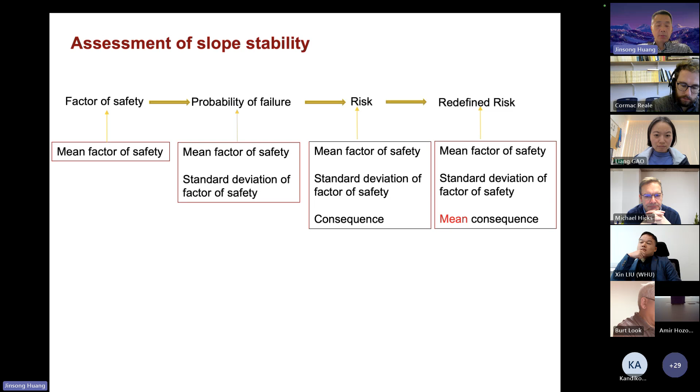So firstly, I want to give you what I'm going to talk about. One-dimensional analysis is about the importance of spatial variability when we are looking at the probability of failure. And then we also look at the three-dimensional case, where the variability in the third direction must be considered. And then I'm going to talk about the quantitative risk assessment of slope. And then I'm going to use the one-dimensional rainfall-induced landslides to showcase what the quantitative risk means. And finally, we'll talk about using site investigation data directly in slope stability analysis. This is our most recent research.

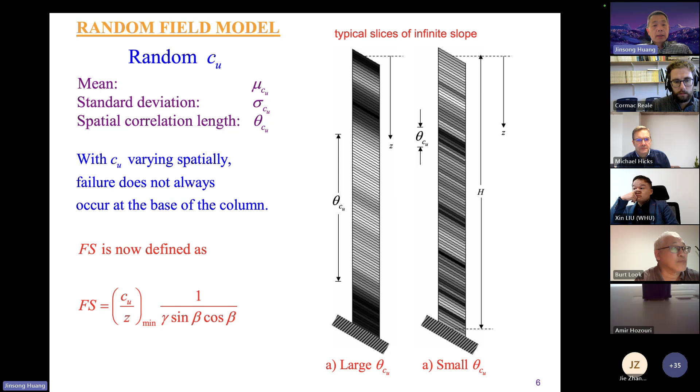We can clearly see that in this formula, if Cu, undrained shear strength, is a function of depth, which is Z, the minimum factor of safety will happen at the place where this ratio reaches the minimum, not necessarily at the bottom of the slope. So when we are using random field to generate the one-dimensional random field to map onto the finite element mesh and do the Monte Carlo simulation, we will find some of the failure will happen in the middle of the slope or not necessarily at the bottom. You can see in the picture.

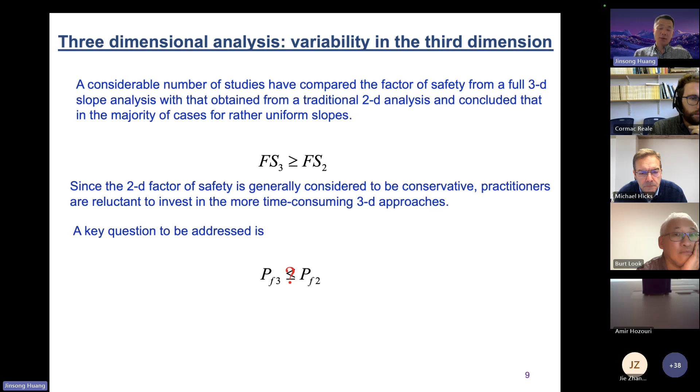And then the next example is a three-dimensional analysis of the slope stability. Traditionally, people know if we use a two-dimensional plane strain analysis of the slope stability, we will always get a lower factor of safety than the three-dimensional analysis. If all the geometry and material properties are the same, this is always true. But if we consider probability of failure, whether the three-dimensional estimation of the probability of failure is smaller than the two-dimensional probability of failure, this question is very interesting, right? Because if the three-dimensional factor of safety is higher, supposedly people will think the three-dimensional probability of failure is going to be smaller, but this is not the case.

This is our result. You can clearly see that the three-dimensional factor of safety is always higher than the two-dimensional one. But when we increase the length of the slope, which is in this direction, the factor of safety got reduced because of the side supports. The effect of the side supports reduces as we increase the slope length. And then the three-dimensional factor of safety converges to the two-dimensional results.

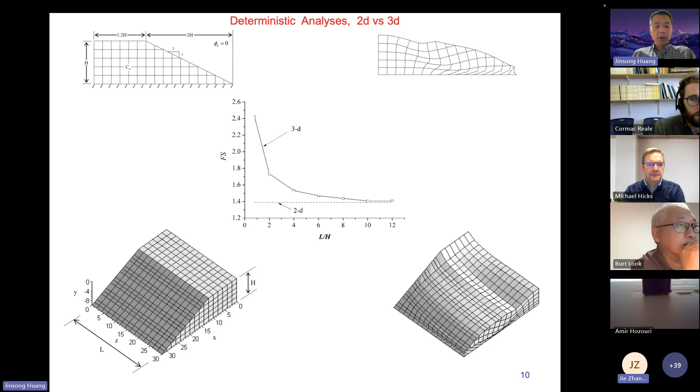So if we look at the probability of failure, and then we just simply extend the two-dimensional model to three-dimensional model. So we simply copy the two-dimensional properties and then extend it to the third direction, and then fix the two ends. In this case, if we estimate the probability of failure, the three-dimensional probability of failure will be always smaller than two-dimensional probability of failure. That's just because of the side support from these two ends.

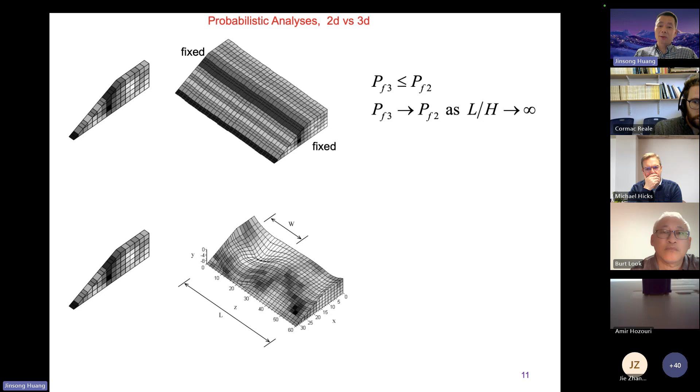But if we consider the spatial variability in the third direction using three-dimensional random fields, you will see that some local failure can happen. Okay? That will cause the probability of failure to increase. So if we look at the results, let me just go.

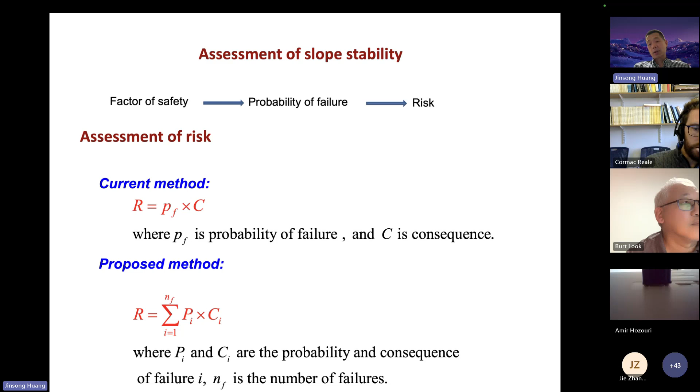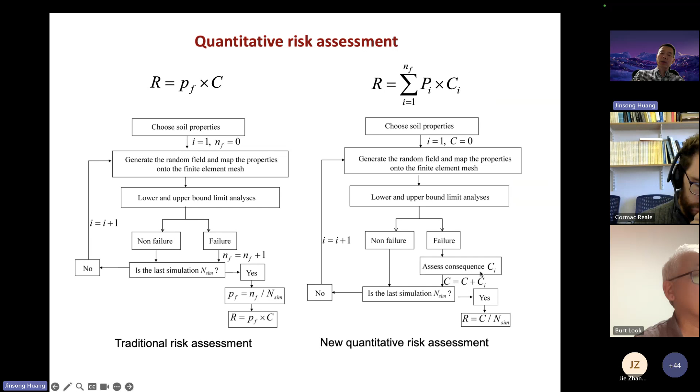The challenge here is, how do we assess this consequence automatically in Monte Carlo simulations? We cannot just plot all the failure cases and look at the failure mode, which is not possible, because we need to do thousands of simulations. So what we propose is using a k-means clustering method, which is a machine learning method. Based on the displacement of each individual node, we separate the nodes into stable nodes and moving nodes.

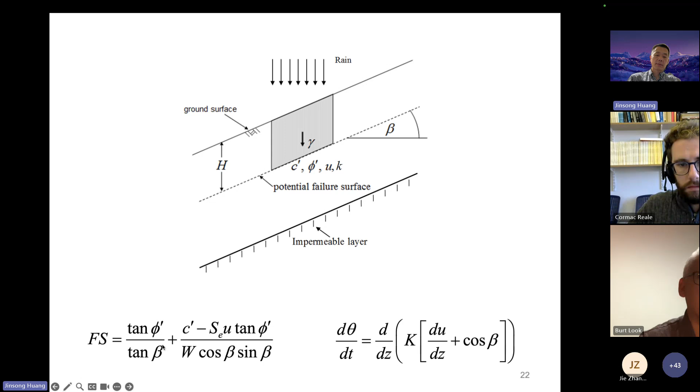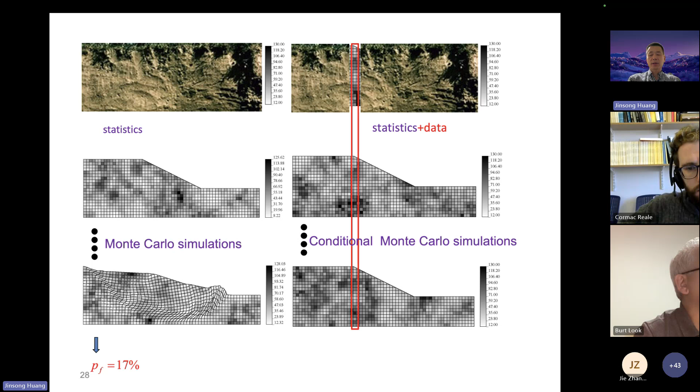And this is our most recent research. We want to use site investigation data directly in slope stability analysis. Suppose we don't have any site investigation data; we just use statistics from the literature and do unconditional Monte Carlo simulations. And if we have one column of CPT results, we can use conditional simulations. So we basically use statistics plus data and conditional Monte Carlo simulations to look at the slope stability.

And then if we further increase to two boreholes, we can do it again, and the probability of failure turns to 0.7%. And if we have 3 CPTs, the probability of failure reaches almost zero, because if we know everything, the slope is actually a stable slope, right? So this example shows if we use 3 CPTs, we get a very good estimation of the slope stability. Basically, this is not a failing slope.

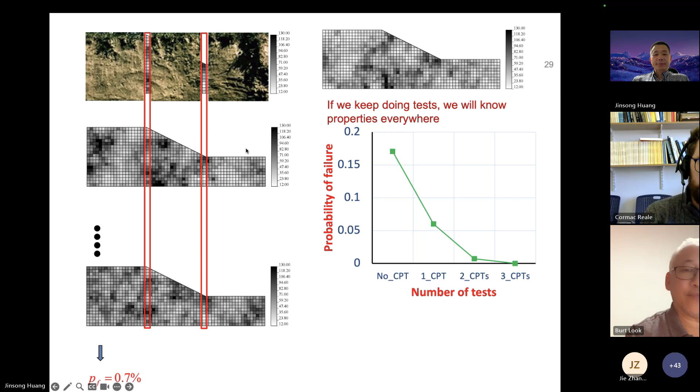And then the final remark is: traditionally we use deterministic analysis, and then we use statistical parameters. And then what we propose is to use statistical parameters plus site investigation data. Now this approach makes much more sense. Okay? Instead of using only the statistical parameters, we propose to use site

investigation data directly. And then eventually I'm thinking we can forget about the statistics. We can use site investigation data directly, all of them, and use machine learning to do the slope stability analysis. This is possibly our next research topic.

Okay, I will finish here. Sorry, I ran over time. Thanks, Jinsong. That's very interesting. Does anyone have any questions? Maybe I'll have... Sorry, go ahead. Comment. Go ahead, please.

Well, I was just going to ask: do you have a means of quantifying the speed at which the failures occur in your consequence analysis, or is it purely volume based, or how does that work? Yeah, this is a very good question. In most recent publications, a lot of people are looking at the speed, the runout distance. That will require a large deformation analysis, while we are using small deformation analysis. This was 10 years ago.

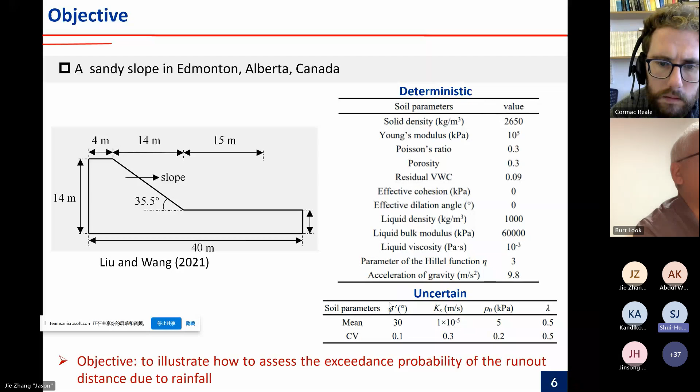If this is relatively long, for example, 24 hours, then we may need to consider this as two rainfall events. The period between two rainfall events is called a dry period, and the rainfall event itself is called a wet period. In this way, we can divide the historical rainfall data into many rainfall events. Each rainfall event could be characterized by two parameters. One is the duration of the rainfall. The other is the intensity of the rainfall.

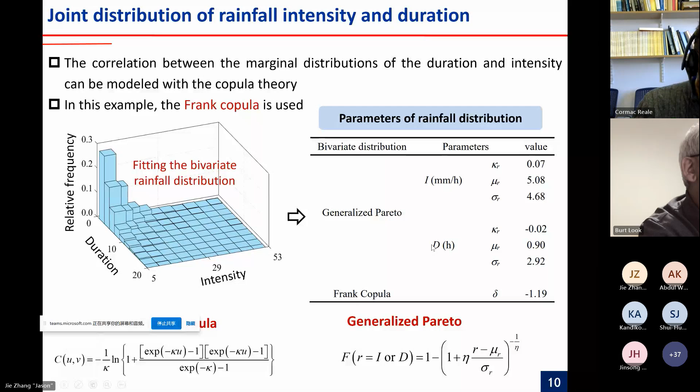Finally, the rainfall is also uncertain in the time space, and its occurrence is also uncertain. And if we assume rainfall events are statistically independent, then their occurrence in the time domain can be modeled through a Poisson process, which is very similar to the earthquake. For earthquake problems, we also often model it as a Poisson process.

And if we apply the Poisson assumption to the rainfall, for this example slope, we will find the parameter lambda of the Poisson model is 15 times per year. So it means on average, this slope will be subjected to 15 rainfalls each year.

So this is a summary of the stochastic rainfall model we described. So basically, we first collect historical data, and then we derive the histogram of the duration and the intensity, we describe its frequency through the Poisson process, and then we can build the bivariate distribution of the duration and the intensity, and we combine these models, then we can simulate the rainfall events during the service time of a slope.

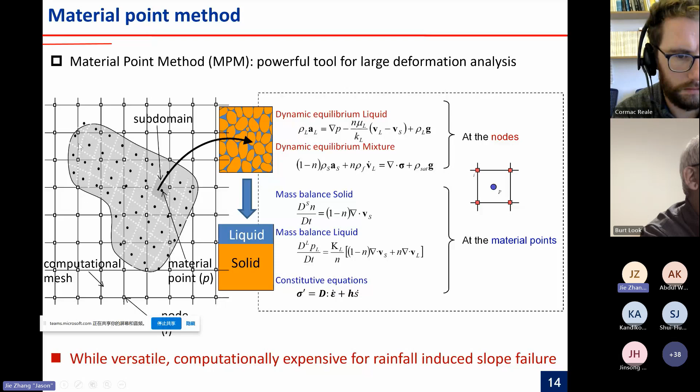But however, when we apply the material point method for the unsaturated rainfall infiltration problem, it will become computationally expensive. And especially when we want to do the rainfall-induced landslide simulation for 1,000 times, then we need to wait for a very, very long time. So later on, we think maybe we can use a simplified method.

Okay, the idea is that we combine the finite element method with the material point method. So before slope failure, when the factor of safety is greater than 1, we use finite element method to simulate the behavior of the landslide. And the material point method is only used for large deformation analysis after the factor of safety is smaller than 1. Okay, so this is the general idea. And these are the models. And the key part is then how to link FEM with MPM.

Then on this slide, we show the governing equations of what we used in the finite element model and what is used in the material point method. So in this case, in the finite element model, we use the Richards equation to do the infiltration analysis or seepage analysis, and we use the limit equilibrium method to calculate the factor of safety of the slope. Okay.

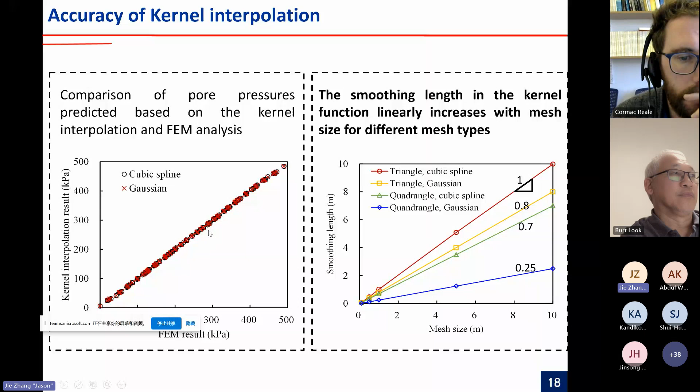And to build the relationship between the finite element model and the material point method, the key part is to map the pore pressure and the stress from the finite element model to the material point model. So in this case, we use the kernel interpolation method. And this figure compares the finite element method as well as the kernel interpolation method. We can say the kernel interpolation method in this case is quite accurate. And we have implemented this strategy within Anura3D, and this is the implementation procedure.

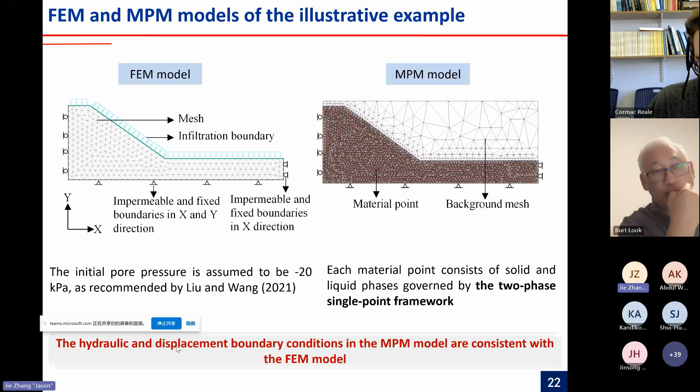Okay, so finally we apply this method to the example slope. So this is the FEM model we used, and this is the material point model we use, and both of them have the same hydraulic and displacement boundary conditions.

And this shows the seepage analysis carried out while the factor of safety of the slope is greater than 1. Okay, and during the seepage process, we use the limit equilibrium to track the factor of safety of the slope. When it becomes below 1.0, then we will move to material point analysis. Okay, so this shows some of the simulation results obtained from the material point method.

The final part is how to evaluate the exceedance probability of the runout distance. So this is the last slide which I have just shown in the previous section. So even though this FEM MPM procedure is useful, if we want to carry out one simulation, that means the simulation of the slope failure during one rainfall event, it will take us about 3 hours.

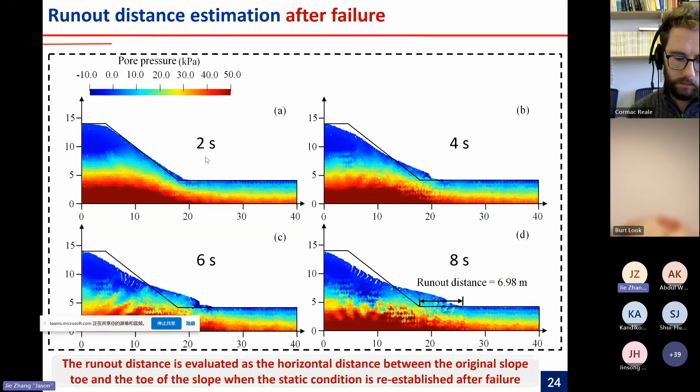3 hours, so it is computationally very expensive. If we want to do it 1,000 times, then it will cost us 3,000 hours, which is very expensive. Okay, so in this section, we are going to talk about how to evaluate the exceedance probability of the runout distance.

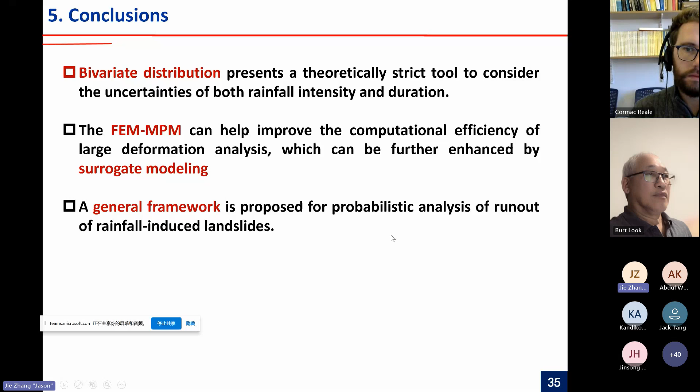And these are the related papers. Yeah, thank you all for your attention. Cormac, so this is my presentation. Thank you. Thanks, Jason. Does anyone have any questions for Jason?

May I? Please. So Jason, very nice presentation. I have a small question. When you use machine learning to build up the surrogate model, you still use FEM and MPM together. So can we just use MPM only to run the simulation and build up the surrogate model?

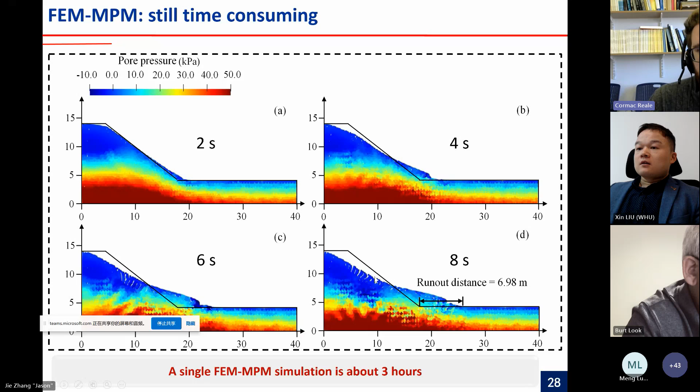Thanks. Does anyone else have any questions before we move on? Hi, Professor Zhang. I'm Xin Liu from Wuhan University. Very nice and clear presentation. I have one thing I don't understand. How do you derive the annual exceedance probability of runout? Do you simulate many different rainfall events within a year? But if you simulate 15 rainfall events, then the computational costs will be very high. So I don't understand how to derive the annual exceedance probability of runout distance.

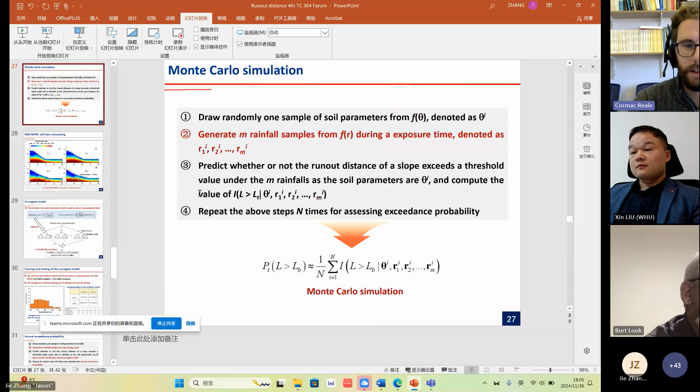Thanks, Jason. I think we'll move on then to Liang Gao from McGill University, if she's here. Yeah, I'm trying to share my screen here. Perfect. Can you see my screen in presentation mode? Yep, we can see it. Thank you, Cormac. Thank you, everyone.

I'm so happy to be invited to share my research progress on the current work on predicting compound flooding hazards by integrating machine learning methods with numerical simulation. The work has been conducted by my students, and here I want to thank my students Hao Xuandu, Kai Fei, Zhiqing Li, and Li Shuqu. So now I'm going to start.

So we know that under the changing climate, the low-lying coastal areas will be affected badly by bad weather, for instance heavy rainfall or typhoon or hurricane events. For instance, in the Greater Bay Area in China, in Guangdong province, the coastal cities are very likely to be affected by these weather events, and the water sources could be rainfall, fluvial water from the river, tidal fluctuation or storm surges, or even dam breach or overtopping floods.

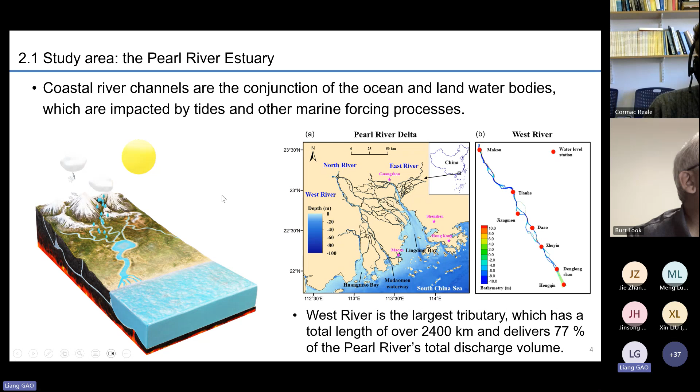We discretize the study area into cells, and for each cell we can consider the rainfall processes. Here we use the finite volume scheme to compute the flooding processes. We can also consider the dam break effect or the overtopping flood. By considering the dikes along the river, if the river level is greater than the dike, we can simulate the overtopping flood to the land area.

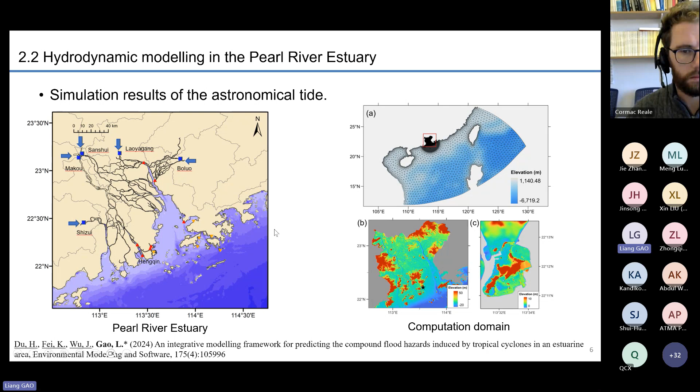For instance, for the Macau Peninsula, the resolution would be 5 meters. For the other regions, we interpolate it into 10 to 30 meters, and for the offshore or coastal area, we use kilometer resolution. This both enhances the accuracy and the computation speed. Here we consider the discharges as input at the inlet of the study area, and also the tidal fluctuation in the coastal area so that the water level changes can be computed.

First, we need to validate our hydrodynamic model. Here we adopt the tidal fluctuation measurements at typical gauges, and we find our simulation results basically match well with observations. Then we consider the wind field, which means we incorporate the parametric wind field into the model so that the wind effects can be calculated. For instance, we can get the basic parameters of a typical typhoon event.

For instance, Typhoon Hato. The basic parameters include the latitude and longitude coordinates of the typhoon track, the maximum wind radius, the maximum wind speed, and the typhoon central pressure. This information gives us a spatial-temporal distribution of the wind field, and therefore the wind effects can be considered and generate the storm surge processes.

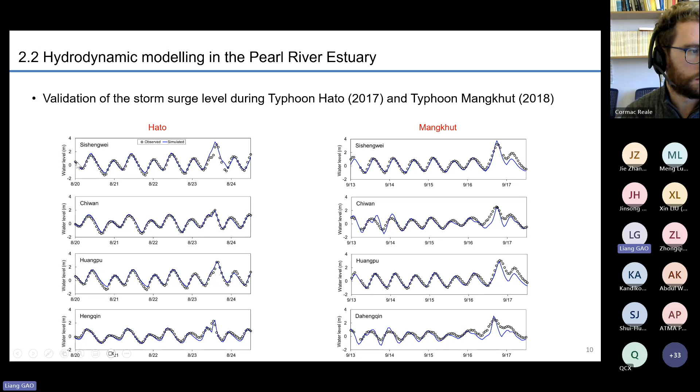Here we extract the measurements during Typhoon Hato and Typhoon Mangkhut, which posed severe consequences to the Greater Bay Area, and we find the wind velocity can be basically captured using our parametric wind model. We further checked the storm surge level predicted by our model against the measurements at typical gauges. So we can validate the model and further apply it to predict the storm surge and flooding processes over the entire region.

So using this model, we can yield the hydrodynamic processes and the long-time series water level fluctuation. Despite the event-based hydrodynamic processes, we can incorporate hydrology models into our hydrodynamic model. For instance, the inlet of the fluvial discharge can be predicted using this open source hydrology processes numerical model.

For instance, we can set up this Xijiang River Basin as an example. So here we can use the hydrodynamic model, and for the upstream area, we can use remote sensing data to drive the hydrology model, and the hydrology model can yield the discharges for the hydrodynamic model as the input data. And we can validate this hydrology model and predict the long-term series of the water level in this Pearl River Delta region.

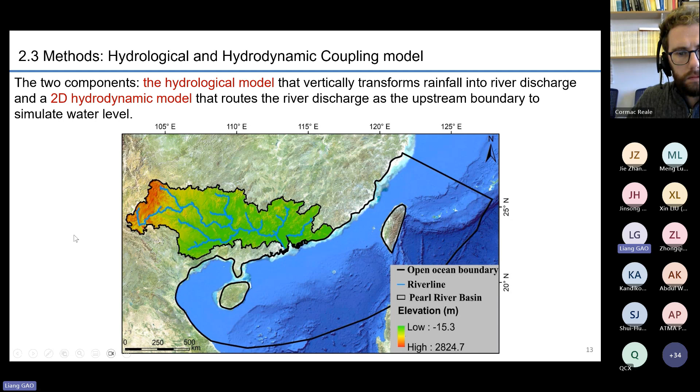So here it shows us the hydrological model and hydrodynamic coupling model. The hydrological model can vertically transform the rainfall into river discharges, and it serves as an input for the hydrodynamic model. And the hydrodynamic model can route the river discharge as upstream boundary and simulate the water level, including the flooding processes in the area of interest, for instance, in the Pearl River Delta, including both the land area and the coastal area, so that we can yield the flooding processes under a given scenario.

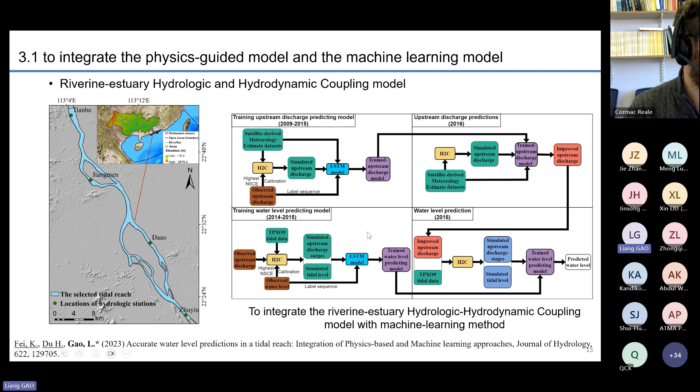So this tidal river reach will be affected by both the discharges in the upstream river and also the tidal fluctuations in these coastal regions. So how those two forces drive the water level in this area can be detected using this machine learning model. So here it shows us the machine learning model coupling scheme. So here we can check by solely using this hydrology and hydrodynamic coupled model, we can yield the long-term upstream discharge results.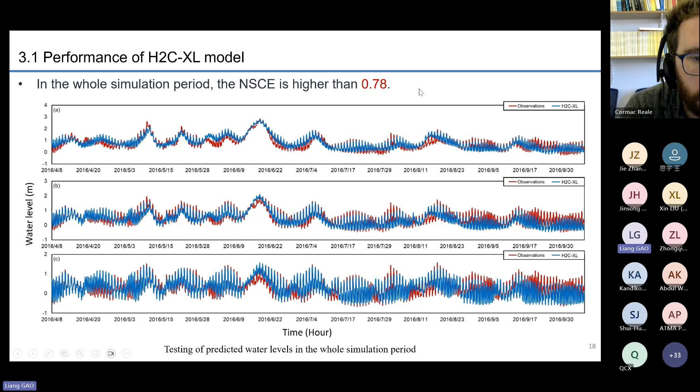For instance, if we have the measurements at 2014 or 2015, we can adopt the simulation results and the meteorological data to predict the water level fluctuations in the coming year, for instance, 2016. And it shows us the prediction results using this coupled model. And this machine learning model can also quantify the contribution from the upstream discharge and the residual, which means the contribution from the tidal fluctuation.

And we can see in different years, if the discharge from the upstream region is different, the relative contribution of the upstream discharge will be different. And the geometry of the river could also affect the contribution of the upstream discharges. And we can also apply this computation scheme, which integrates the machine learning model with the simulation results, to predict the storm surge effects in the Pearl River Delta.

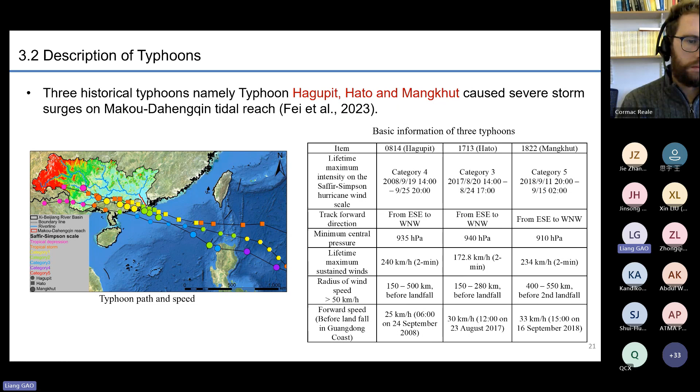For instance, we can extract the basic information of some typical historical typhoons, and then we can use the similar scheme to predict the event-based time series of the water level. And it also yields relatively good results. Further, it can tell us more about the relative contribution. For instance, the local forcing or the remote forcing can be evaluated. For instance, the local forcing, we define it as the atmospheric pressure, the atmosphere.

Sorry, because I hear some noises. Is it from my computer? I'm sorry for that.

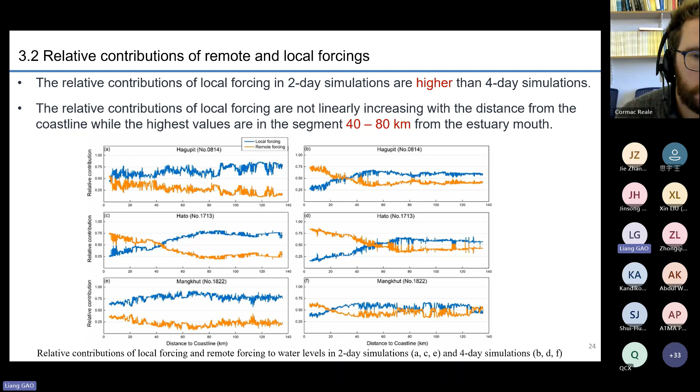So the local forcing may involve both the atmospheric pressure and the wind stress, and the remote forcing is basically from the upstream discharge and the downstream tidal fluctuations. So here we can determine the relative contribution of the two, and we can also check under which kind of condition the relative contribution and the interaction may have the peak interaction in the river tidal reach.

So you can see the water level, which is affected by both the local forcing and remote forcing. If these two occur in a very short period, we can see the water level can reach a very high level, and it will affect the flooding effects on the study area. And we can also check where the peak values can be achieved.

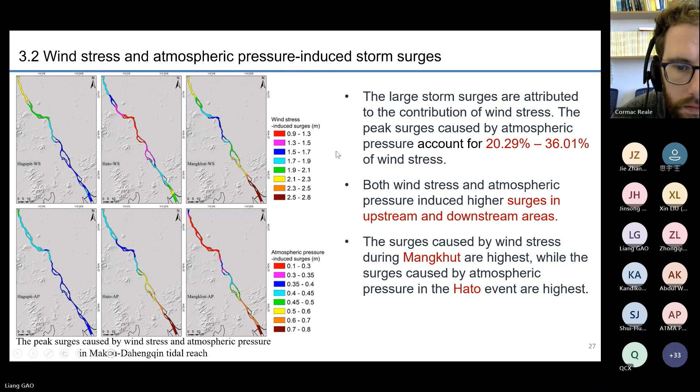For instance, we can check under the given tidal reach: if the local and remote forcings are in the same phase, the peak values can be amplified, which means although the remote forcing contributes more, if we ignore the local forcing, it will underestimate the amplification effects. And we can also further quantify the local forcing and the relative contributions from the wind stress and atmospheric pressure.

Further, we can also apply the continuous wavelet transformation model to quantify the interaction in the tidal reach. Still in the same Pearl River Delta, we can apply this continuous wavelet transformation to detect the diurnal or semi-diurnal or other storm surge on the interaction among the tides, river, and surge effects.

So here we can see from Makou to Hengqin. Hengqin is located in the nearest place next to the offshore region, while Makou is located in the relatively upstream region, and we can find the flood stage is obvious in the Makou station, while it's not obvious in the open area, Hengqin, which is in the offshore area. The high flow will dominate the water level with a very high range. For instance, it dominates at 6 meters. But for those open regions, the tidal effects dominate. For instance, in Hengqin the tidal effects are obvious, while for Makou, it's not that obvious.

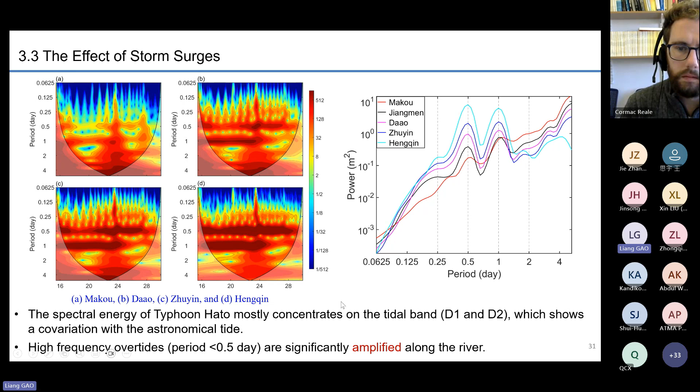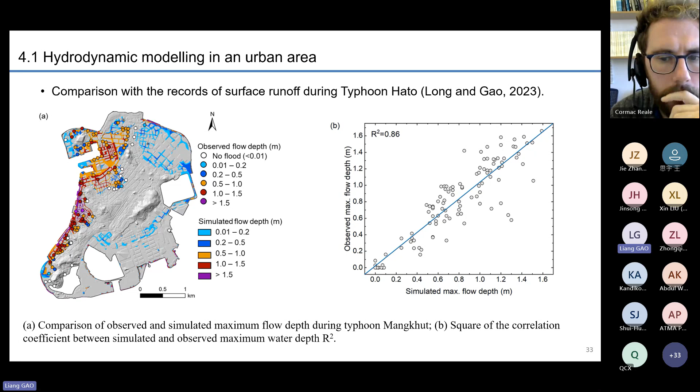We can also apply this model to the small urban area. For instance, we can integrate the underground drainage flow simulation tool with the surface runoff process simulation tool. So here we can implement the governing equation to simulate the drainage flow, and we can couple the surface process with the drainage flow. Then we can validate the numerical model with the observations, for instance, observations under specific typhoon events. And we can also validate with the gauge measurements on top of the land surface of the Macau Peninsula.

And we can compare our simulation results with the observations. After validating the model, we can apply a hybrid surrogate model to get the results by reducing the computational cost. So here we use the LSTM model to get the structure of the drainage flow, and then we use a 1D CNN model to capture the process of the water depths. After building up this surrogate model, we can speed up the simulation.

And using this model, we can also capture the storm tide level and the water depths at some typical locations. For instance, we can validate it against the measurement at the surface gauges by comparing the water depths on the surface. We can find the surrogate model can basically capture the water process, and because the measurement in the drainage pipe is relatively hard to achieve, basically we can only validate our model using the surface observations. So here, we can also compare our model performance with the numerical model. It can also capture the peak and the time series of the flooding processes.

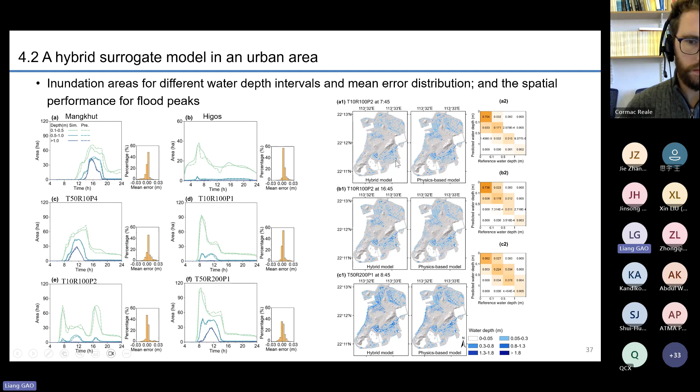And after comparison, we can demonstrate the surrogate model can effectively predict the spatial extent. If we ignore the simulation results and apply this machine learning model directly, we can see the overtopping flood caused by the storm surges will be overestimated. So it is also essential to integrate more simulation results into this surrogate model. And this surrogate model can greatly reduce the computation time. So it will take us less time to achieve relatively reasonable results.

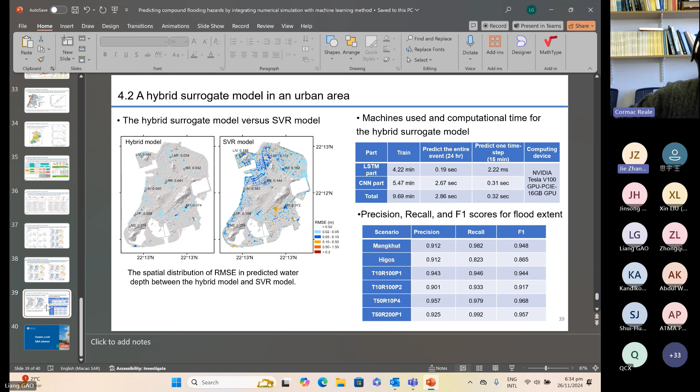Indeed, early warning: if we are given the meteorological data, we can conduct the early warning. For instance, we need the 1-hour, 3-hour prediction of the typhoon event or the heavy rainfall event. If we obtain this prediction of meteorological data, we can conduct the early warning. Right. So it would just need weather data for the next few days or something like that. Yeah.

Because here we can obtain, for instance, 24-hour typhoon event data with accuracy about 80%. Then we can conduct this 24-hour early warning prediction, and that's how we conduct this early warning prediction. Because this model is validated and the data is based on the Pearl River Delta, if we want to apply it to another place, perhaps we also need to incorporate the data of the area of interest.

Excellent. Does anyone have anything else? I have a question. Yep. Thank you. Very nice presentation.

One is, I'm not very familiar with the topic. Got people talking about sponge city. Sponge city, yeah. Yes. So in your model, can you consider that? If we can conduct the parameter analysis of these measurements for the sponge city, for instance, the green roof or the water tank or some other implementations, we can consider this, but we also need to validate the parameters. For instance, if the infiltration parameter is changed or some of the rainwater is detained, we need to consider it in the model, and we need to modify the parameters.

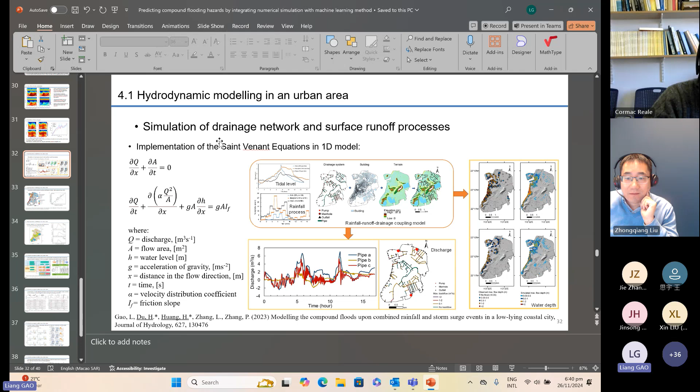Very interesting studies. I'm just wondering if you train all your machine learning models for each site, or you have a generalized model? Indeed, it's for a specific site, because the drainage network is first structured, and then the surface water is also structured. So here we predict each cell on, for instance, the Macau Peninsula. So this model can capture the mapping relations of each cell, the spatial and the flooding processes. So it's for a specific site.

So if we want to apply it to another place, we need to train the model, incorporating, for instance, the DEM data, the historical data, the meteorological data, and simulation data. So actually, your machine learning model is built based on the simulations from hydrology modeling, right? Yeah, we need to incorporate both the observations, the meteorological data, and also the simulation results. For instance, we needed to carry out more than 50 events caused by the combined effects of rainfall and typhoon. That's how we build up the surrogate model.

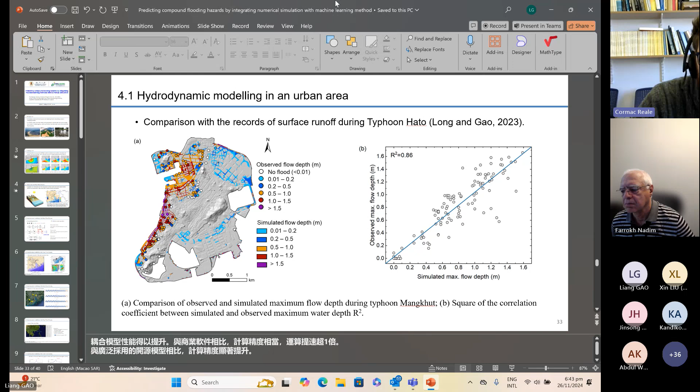And there's just one final question in the chat then from Atma Prakash, which is wondering how many variables do you need to model the typhoon, and what sort of variables do you need? You mean the typhoon field, or the wind field, right? For the wind field, I guess so. Yeah. Indeed, for the wind field, for using our model,

we can apply both the parametric wind models, and also we can incorporate the WRF, which means the weather model. The weather model can yield the wind field, and for the parametric wind model, we can use the basic parameters, including those four: the movement of the typhoon, the center of the typhoon, the maximum typhoon radius, the maximum wind speed, and the central pressure. The parametric wind field generated using these parameters can be applied to simulate the wind effects.

Indeed, we can also check. Many researchers have proposed parametric wind models, and we adopt the Holland model. Holland proposed this parametric model, and we compared its performance. Nowadays, we can also incorporate the WRF model. The WRF model can be applied by integrating the weather model with the hydrodynamic model.

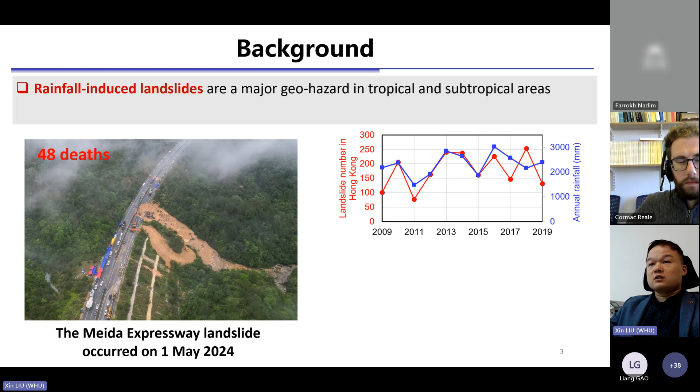In my presentation, I focus on rainfall-induced landslides because rainfall is a major triggering factor of slope failures. As introduced by Professor Zhang Jie, the FN curve has been widely used in landslide risk management. Here, the vertical axis, AF, represents the annual frequency of N or more fatalities, and it is associated with the annual probability of rainfall-induced slope failure, or PFA, at a specific slope.

However, only a few previous studies quantified the annual slope failure probability in a rigorous manner. So in this presentation, we would like to present a probabilistic method for quantifying annual slope failure probability. As we all know, landslide risks or landslide probability are determined by uncertainties in geotechnical engineering. The first major uncertainty is soil spatial variability, which also has a significant effect on landslide evolution, and Professor Jin Song has talked about this.

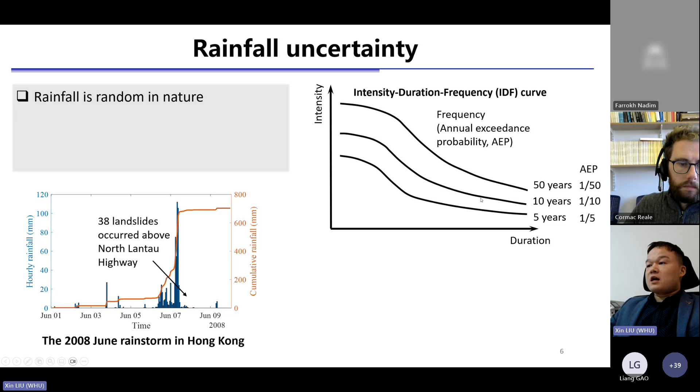In addition to soil spatial variability, rainfall uncertainty is also a major uncertainty, because rainfall is a highly uncertain natural phenomenon. Until now, we cannot predict how much rainfall will fall and when rainfall will occur. So many different rainfall events could occur at a specific slope. For example, in practice, an intensity duration frequency curve has been used to describe rainfall uncertainty. When the return period is 10 years, there are many different rainfall events that correspond to a return period of 10 years.

So all these different rainfall events contribute to landslide risks, and they should be properly considered when quantifying annual slope failure probability. So how to properly consider all these different rainfall events for landslide risk assessment remains an open problem. And in the previous studies, many slope reliability methods have been developed to quantify slope failure probability.

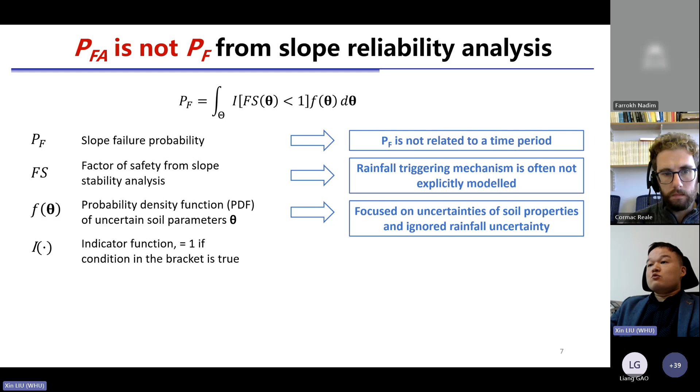It should be noted that slope failure probability is not annual slope failure probability. This is because most previous studies focused on uncertainties of soil properties and ignored rainfall uncertainty. And the rainfall triggering mechanism is often not modeled. As a result, slope failure probability is not related to a time period.

So in this study, we focused on annual slope failure probability. And we are going to present a framework for quantifying annual slope failure probability at a specific slope. Both rainfall infiltration and landslide triggering mechanisms are considered, and both rainfall uncertainty and soil spatial variability are modeled. The proposed framework consists of 4 modules.

The first module is a parametric study on slope seepage and stability analysis. This leads to a critical rainfall pattern curve, which reflects the landslide triggering mechanism. The second module is the statistical analysis of rainfall data, and this leads to a bivariate distribution of I and D, which reflects the rainfall and frequency. And Professor Zhang Jie has introduced how to develop this joint distribution.

The third module is the characterization of soil spatial variability from site investigation data. Then the annual slope failure probability can be quantified. So let me introduce the critical rainfall pattern curve first. Consider an illustrative slope shown on the right-hand side, and we can perform a parametric study considering different rainfall patterns. For example, several rainfall patterns can be prescribed and imposed to develop a series of slope models. Then slope seepage and stability analysis can be performed repeatedly.

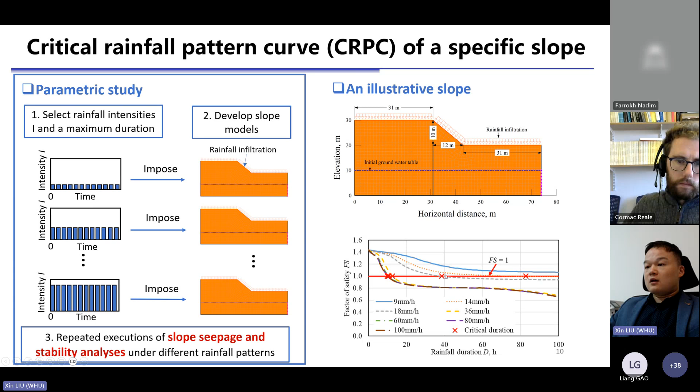And this figure shows the stability results. The factor of safety decreases monotonically as rainfall duration increases. And FS decreased to 1 at a critical time point, represented by these red crosses. This time point is denoted as the critical duration. So we can draw the critical duration versus rainfall intensity in this figure. The critical rainfall duration decreases as rainfall intensity increases.

And these data points can be fitted by a curve. This curve divides all rainfall patterns into a stable zone and an unstable zone. Rainfall patterns in the unstable zone can trigger slope instability, while rainfall patterns in the stable zone may not. So this curve is the critical rainfall pattern curve. And we find that CRPC can be well fitted by a power function. The CRPC represents performance of a specific slope under various possible rainfall patterns.

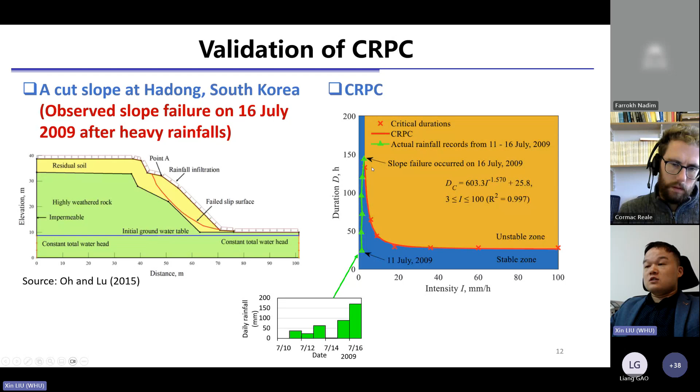And when the spatial variability is considered, there is a group of CRPC, and the CRPC are scattered rather than a single curve. So in this case, CRPC parameters become functions of soil properties. Okay, now let's see the slope failure event induced by a single rainfall. When both uncertainties are considered, it may be expressed by Fs less than 1. And based on CRPC, it can be transformed to this expression. Here we don't need to calculate Fs once the CRPC have been obtained.

Then we can quantify the probability of slope failure induced by a single rainfall event. There are 2 cases. For the first case, only rainfall uncertainty is considered, and this leads to an analytical solution of PF1. For the second case, this leads to a semi-analytical solution. So let's firstly see the first case, when only rainfall uncertainty is considered, and only I and D are deemed random variables. So we need the joint distribution of I and D, which can be developed using copula theory.

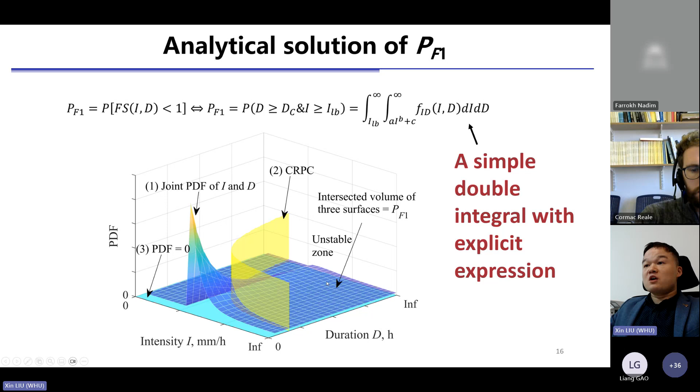And in addition, when both rainfall uncertainty and the soil spatial variability are considered, the analytical solution can be used to derive a semi-analytical solution. And due to time limit, the mathematical details are bypassed in this presentation.

Okay, now let's move from slope failure probability induced by a single rainfall event to annual slope failure probability. A slope may experience n rainfall events within a year, and n is uncertain. So the uncertainty of n, the number of rainfall events within a year, shall be considered. And based on the theory of total probability, the annual slope failure probability can be expressed as this equation.

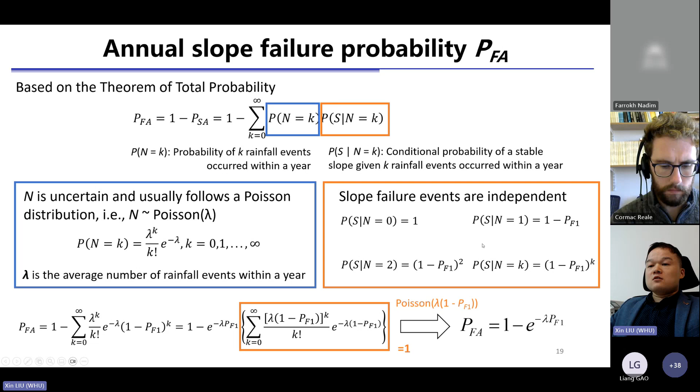And because n follows a Poisson distribution, the probability of k rainfall events occurring within a year can be expressed by this expression. And the conditional probability can be obtained by assuming that the slope failure events are independent. So then based on these equations, we can obtain a simple analytical expression of annual slope failure probability. PFA depends on lambda and PF1, where lambda is the average number of rainfall events within a year.

So when lambda is 1, meaning there is only one rainfall event within a year, PFA, the annual slope failure probability, is almost equal to PF1. And when there are 10 rainfall events within a year, annual slope failure probability is 1 order of magnitude larger than PF1. And now we have PF1 and PFA. In addition, we can derive slope failure probability over m years, PFM. And these equations reveal the analytical relationships for slope failure probability considering different time periods.

Okay, now let's see two examples. The first example is a cut slope in South Korea. This example is taken from a previous study, so the same model and parameters are directly adopted, and then a parametric study is performed.

Here are the slope stability analysis results. FS decreases as the rainfall duration increases. So we can obtain the corresponding CRPC, and the CRPC decreases as the rainfall intensity increases. It can be well fitted by a power function, and it can also be verified by the actual rainfall records that induced the slope failure.

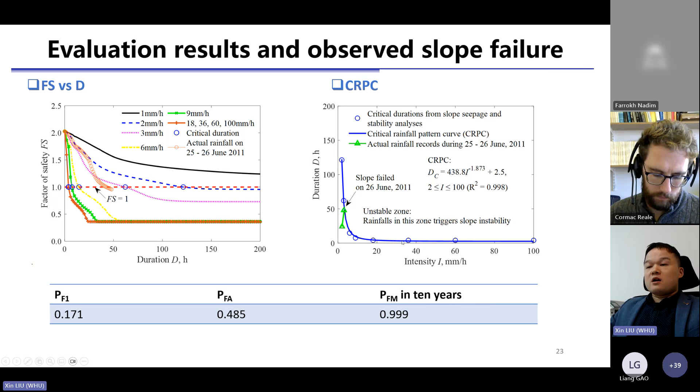And using the CRPC, this expression and the joint distribution of I and D, we can calculate annual slope failure probability. In this case, the annual slope failure probability is 0.485, and the slope failure probability in 10 years is as high as 0.999. This high probability is consistent with the observed slope failure. This slope failed within 2 years after it was constructed.

And the second example is a single layer slope. In this example, both rainfall uncertainty and soil spatial variability are considered. Here we also consider 3 different variability levels. The high variability level has the highest coefficient of variation for the soil parameters. So when the soil properties have a high variability, the CRPC are quite scattered.

And for the intermediate and the low variability, the CRPC are scattered in a narrower region. And when there is no variability, the CRPC converges to a curve, and this is the deterministic case.

So the annual slope failure probability for the above mentioned 4 cases is quantified, and the annual slope failure probability decreases and converges to a constant value when there is low uncertainty. For this region, rainfall uncertainty dominates annual slope failure probability. And when the variability level of soil property is high, both soil spatial variability and rainfall uncertainty determine annual slope failure probability. The results show that rainfall uncertainty should be considered when quantifying annual slope failure probability or landslide risks.

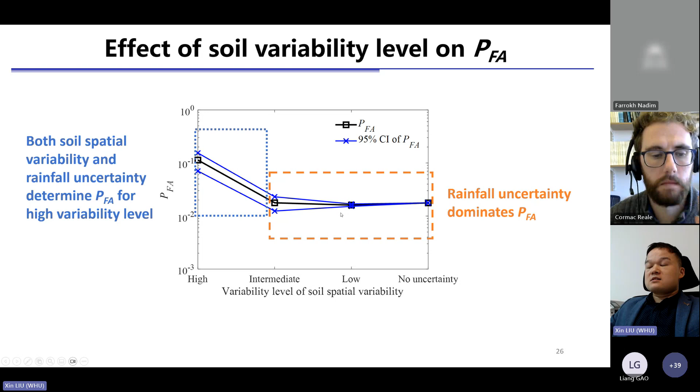So these are the conclusions. In this presentation, we develop a probabilistic framework for quantifying annual slope failure probability of a specific slope, considering both rainfall uncertainty and soil spatial variability. CRPC is developed to comprehensively represent the performance of a specific slope under various possible rainfall patterns. The proposed method may be further extended to quantifying landslide risks of climate change at a specific slope.

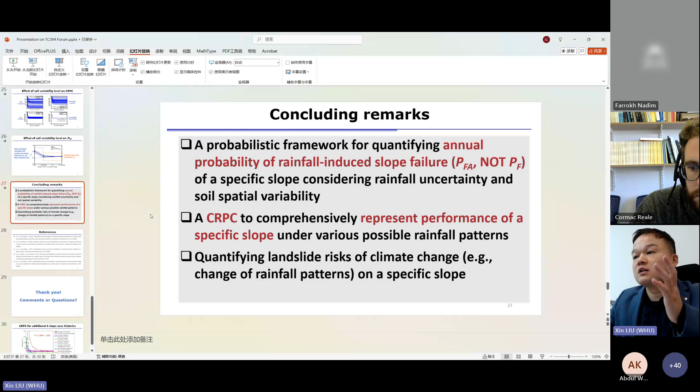So firstly, if you want to quantify the time variant slope failure probability, you need to model the time variant rainfall, or you need the monitoring data of time variant rainfall, and this is the input. And then you have to quantify the uncertainties of soil properties. In addition, we found that you need to perform reliability updating, because if you don't, the uncertainties in soil parameters could be very high, and the failure probability is insensitive to the time variant rainfall.

As a result, you can obtain a time variant slope failure probability, which is sensitive to the time variant rainfall. So if you are interested, you may read my papers. It's related to digital twin. Okay, this is the first question.

And the second question is related to spatial variability. He says it can be relatively easy to understand for small sites or particular slopes, but can we model spatial variability over large areas? Yeah, this question is very interesting. I'm not an expert on the characterization of soil spatial variability. I don't know the answer. I think it is difficult. Yes. Does anyone else have any questions for Xin?

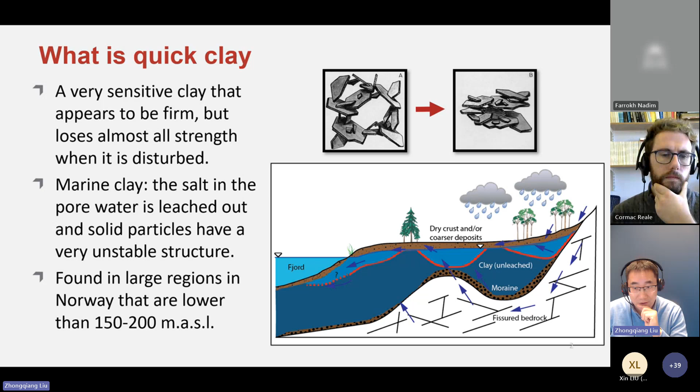With quick clay, only a small change in the stress state may cause it to flow with large strain, and it behaves like liquid when remolded, with a very small remolded shear strength, which could be lower than 0.5 kilopascal. In Norway, there are about 3,000 registered quick clay hazard zones, and statistically we have almost 1.5 large quick clay landslides per year. More than 85% of large quick clay landslides in Norway in the last 15 years were due to human activities, in connection with our constructions.

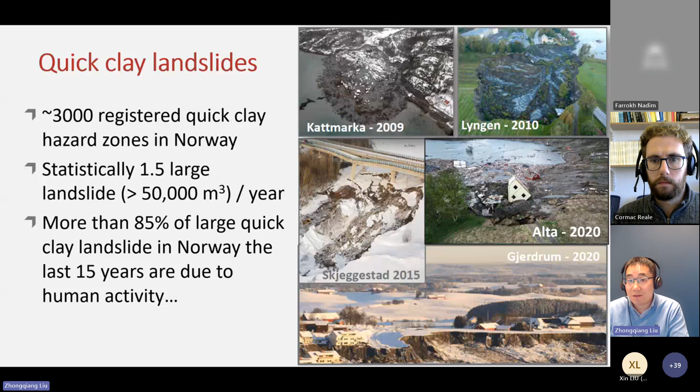On the right side, you can see a lot of quick clay landslides that happened in the past 15 years, which resulted in a lot of damage, both to buildings and to society as well.

So some of you may know the famous Rissa landslide that happened in 1978. So after that, a national program for identifying quick clay hazard zones was established in the early 80s. So the program led to mitigation of hazard zones and enhanced public and government awareness of quick clay landslides, and hence a very dramatic decrease in large slope failures from the early 80s.

So between the 80s and 2010, basically the landslide frequency decreased from nearly 1.5 landslides per year to around 0.6 landslides per year. Now, however, during the past decade, the frequency of large landslides has increased again to a level very similar to that of the 70s. And the reason for this increase could be an increase in infrastructure development and the worsening of slope stability over time due to natural processes such as erosion, rainfall, precipitation, and flooding.

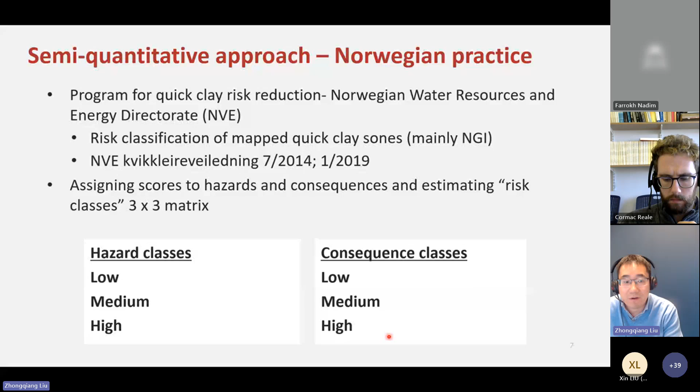And the hazard is described as low, medium, or high, depending on the weighted hazard score. And the consequences are also described as low, medium, and high. They are derived from a scoring and weighting system I'm presenting later on. And basically the risk classes come from the 3x3 matrix for hazard and consequence, and we end up with 5 levels of risk classes. So the risk classes depend on topography, geology, and geotechnical conditions, and also the changes due to human activities, including climate effects and erosion as well.

So for instance, the sensitivity. Basically, if we have high sensitivity, it's an indication of quick clay. So then the slope is unstable, and we have different weighting factors applied to various hazard indicators based on our experience.

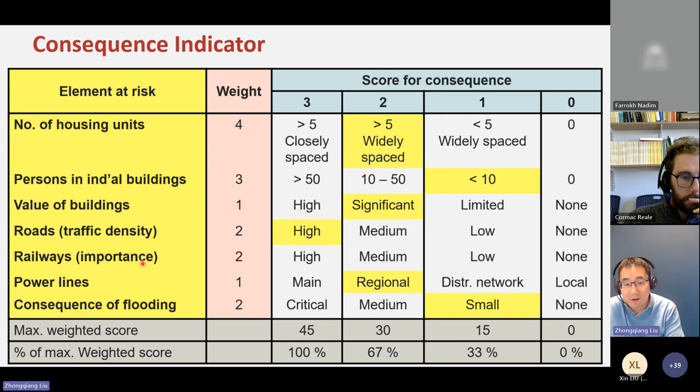And then as we know, the risk is the product of the weighted hazard and weighted consequence, where the weighted quantities are taken as the ratio of maximal possible total scores. So basically, we have 100 for hazard and 100 for consequence. These are maximal values. So we end up with a risk value between 0 and 100 by 100, or just 10,000, right? So the lowest is 0 and the highest is 10,000. And as I said earlier, we have 5 classes for the risk level with different risk weighted scores here.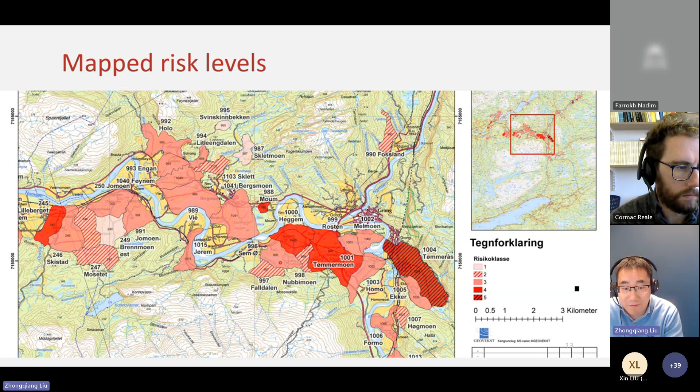So in the second part of my talk today, we focus on some recent developments at NGI, looking into landslide initiation and also runout. So we have been talking about quantitative landslide risk assessment. Basically, it presents a major challenge to the geoscience community. The main point is that risk requires the numerical exploration of both hazard and consequence.

So we have to answer a couple of questions. What's the annual probability of slide initiation, as presented by Professor Liu Xin just before this presentation? And when we have landslide initiation, we have this occurrence of a landslide. We need to assess the runout part, right? So basically, these are the 2 components, and then we need to assess what the landslide consequences are if the landslide happens.

So the first case study, basically, we were looking into the initiation. So this, the Finneidfjord landslide, happened in 1996. The failure initiated offshore and developed in a retrogressive manner, encroaching about 150 meters inland and removing a 300-meter long section of the main highway.

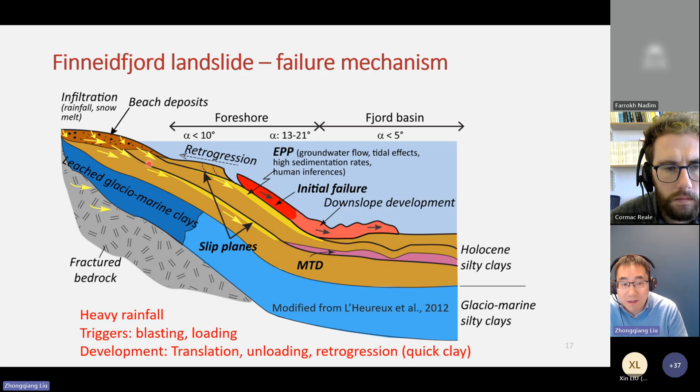an increase in overburden stress due to the dumping of material from the construction, and the initial failure occurs in the very thin event bed, and a slab of sediments moving downslope along this bed, as they are softer than the surrounding sediments here. It develops retrogressively from the fjord to the shore and ends up with a large landslide failure.

And in this study, the probability of slope failure was investigated, and the level of the filling height from 0 to 2.5 meters was used as a triggering factor. The very thin sensitive clay layer was included in the numerical modeling, and the simulations were conducted in PLAXIS finite element analysis using the NGI-ADP constitutive model, accounting for the anisotropy of the undrained shear strength, which is unique for quick clays in Norway.

So basically, these are input variables for the simulations. We have undrained shear strength for the slope, and also the undrained shear strength for the weak layer as well, the friction angle for the filling materials, and another random variable, the softening parameter, which is a correction required to account for the reduced capacity due to strain softening of quick clays.

So basically, this is the workflow we propose in this study, and the probabilistic analysis was combined with the finite element method with an in-house Python code. We start with building a finite element model in PLAXIS, and then the Python code generates random numbers from the statistical description of the input parameters, and the code then feeds the generated random variables into the PLAXIS 2D model. And then the calculated results were saved for each iteration.

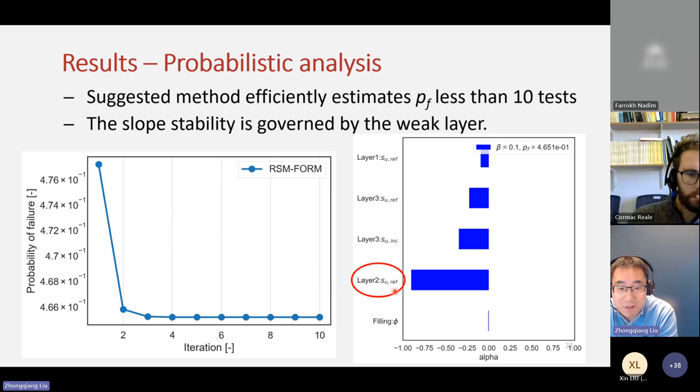So basically, these are results from probabilistic analysis, and it suggested that the method could efficiently estimate probability of failure with less than 10 tests, and the slope stability is governed by the weak layer, basically the undrained shear strength parameter of the weak layer, as expected.

So the landslide took place at the southwestern corner of the lake, and the initial landslide had the shape of a very long and narrow pit open towards the lake in this direction. At this point, large flakes A and B started moving towards the lake, but not through this opening, but in the direction of the terrain slope.

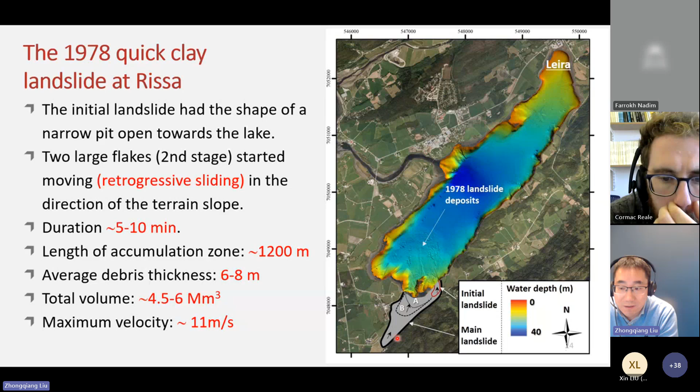And a series of smaller and retrogressive landslides followed over a very short period of time, within 5 to 10 minutes. And the runout distance from this point to the far extent is above 1 kilometer. The average debris thickness in the lake is about 6 to 8 meters, and the total volume is around 4.5 to 6 million cubic meters. The maximum velocity observed from the video is about 11 meters per second. So the sliding process propagated backwards up to the rocky mountainside where it stopped.

So to better understand the runout behavior, we developed the in-house numerical model, BingClaw, at NGI. The model is a viscoplastic model with Herschel-Bulkley rheology, which has been proven to better describe the behavior of quick clay. And we made the model as a depth-averaged model in 2 horizontal dimensions. An advantage of modeling debris flow with the depth-averaged model is the ability to describe complicated 3D geometries easily in pseudo-3D planes and significantly reduce the calculation load.

And we have a plug layer and a shear layer in the model. Basically, the plug layer overlies a shear layer. Near the surface, shear stress is less than yield stress, leading to an unsheared plug layer riding on top of the shear layer. We have the observation from the field that a large amount of the landslide body is basically not remolded. So they are riding on top of the shear layer, and material behaves as a solid with constant velocity for the plug layer, and flows as a fluid past the threshold for the shear layer with a parabolic velocity profile. And remolding varies exponentially with accumulated shear strain, this gamma.

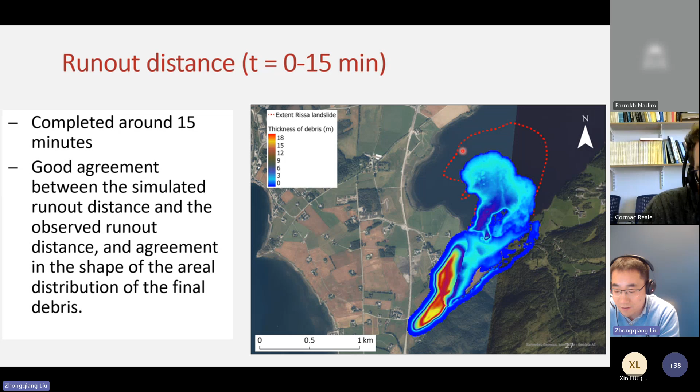And these are some results from our back analysis of the Rissa landslide. We end up with a very good agreement between the simulated runout distance and the observed runout. The dashed red line here is the runout extent observed, and also the agreement in the shape of the distribution of final debris. In terms of velocity, our calculation gave us a maximum velocity of about 12 meters per second, and our observation is 11 meters per second.

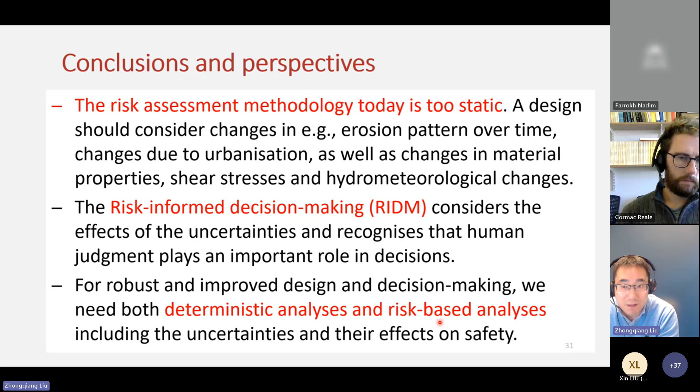So then the conclusion: as I said earlier, the risk assessment method today is a bit static. Risk is dynamic, with erosion over time, and also changes in material properties, shear stresses, and hydrology parameters as well. All this could result in a dynamic risk. But risk-informed decision making could consider the effects of uncertainty, and we could combine our human judgment in the decisions. Both deterministic analysis and risk-based analysis are quite useful. We always start with deterministic analysis, then estimate the uncertainties in our input, then carry out a probabilistic analysis. So I have 2 more slides.

At the moment we have one NGI internal research project. We call it On Safe Ground. We are looking into the behavior of quick clay landslides. We have covered almost all the aspects of quick clay landslides, from initiation to runout, and also mitigation of the risk. And recently we are quite lucky to get a research project from the Norwegian Research Council, and there are large components of risk assessment of quick clay landslides in work package 3 and work package 4. So we are doing research around risk assessment of quick clay landslides. Please reach out if you are interested.

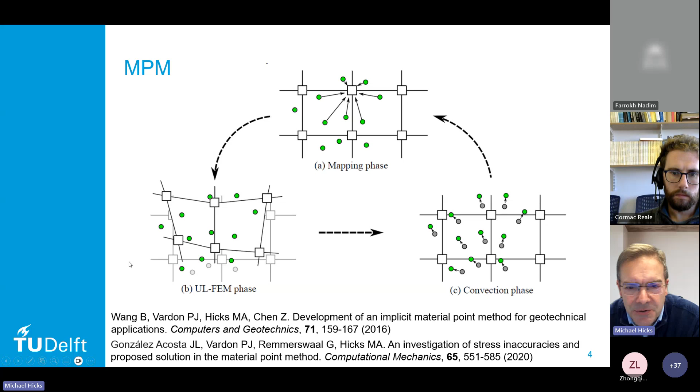Just to give you one idea of what we do, we use something called the generalized interpolation material point method in our algorithm, and we have various strategies for combating problems associated with stress oscillations and pore pressure oscillations and so on, associated with the material points not being in the optimal positions, and also moving from one background element to another. But anyway, I won't dwell on the details of the numerics in this particular presentation.

Now, the random material point method, of course, is just an extension of the random finite element method. And so what we do is we model the spatial variability using random fields, and the random field properties are assigned to the problem domain at the material points themselves. We carry out multiple realizations of the boundary value problem using a Monte Carlo simulation, and in each realization we solve the problem using the material point method.

So in the examples I'm going to show you, we are looking at spatial variability in a single soil layer. So we're not looking at multiple layered problems in the illustrations I'm going to show you, although of course we do look at that as well. And the illustrative examples are restricted to undrained shear strength and linear strain softening.

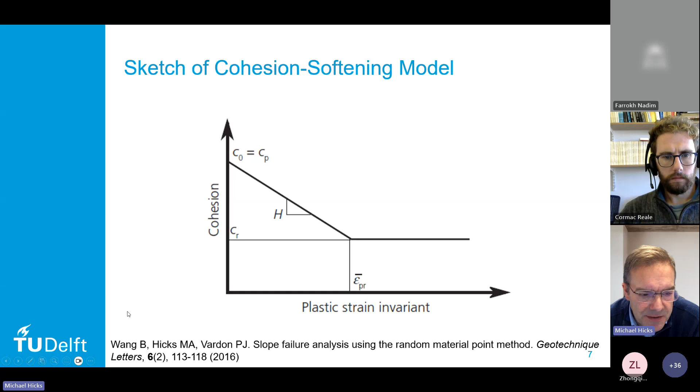So it's a very, very simple material response, but we also have fully coupled algorithms with the random material point method, and also unsaturated capability as well. So these are just simple total stress strain softening simulations to illustrate the influence of spatial variability on the development of failure processes in slopes. So this is the very simple constitutive model we look at. It's just a linear strain softening model.

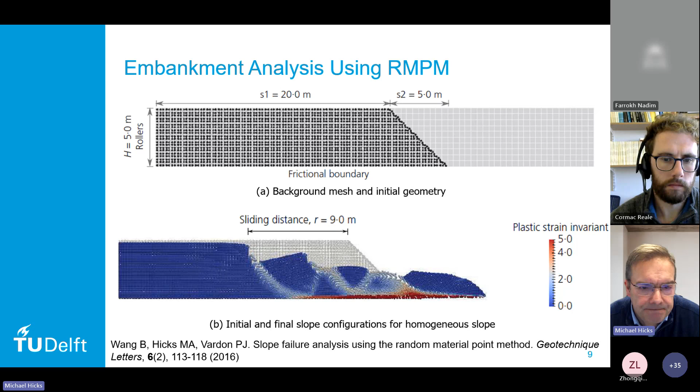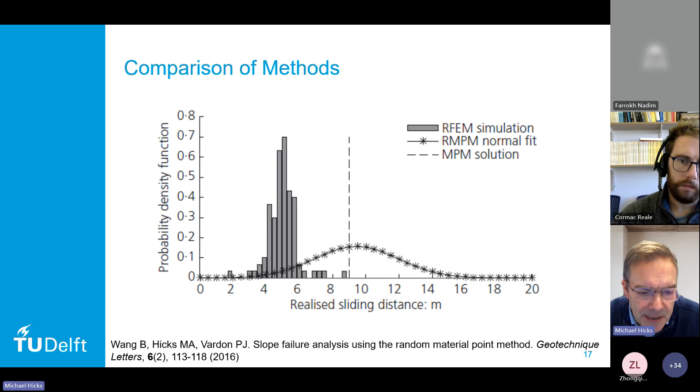And so if we compare all three analyses, you can see that as the horizontal scale of fluctuation gets bigger and bigger, the distribution of sliding distances gets bigger and bigger. And what's quite interesting is if you compare this with what you get with a random finite element analysis, so I'll compare the theta h equals 1 meter solution in this next picture with a random finite element analysis. You can see there's quite a big difference, because obviously the random finite element method only computes the initial slide, and it doesn't compute what can happen afterwards in, for example, a strain softening material.